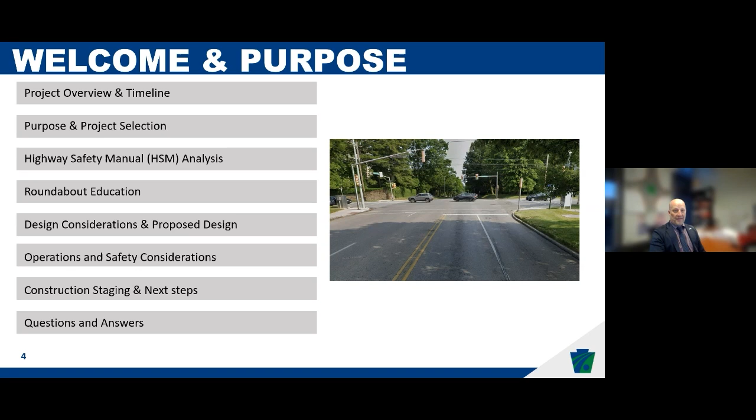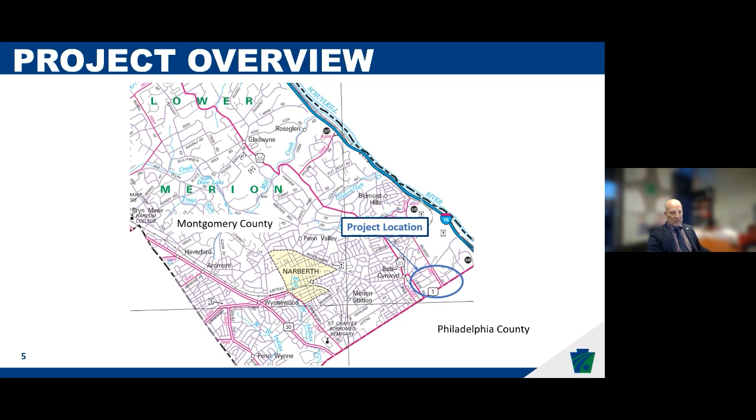This safety project is located at the intersection of Belmont Avenue and St. Asaphs Road. Belmont Avenue is a state route owned by PennDOT, and we're in Lower Merion Township in Montgomery County. The intersection itself is 1 block north of City Avenue, and the project is located within the City Avenue district, which is a business district. We've been studying this project since 2019, and we're currently in what we call the preliminary engineering phase. Throughout the process, there's been extensive coordination with Montgomery County, Lower Merion Township, the City Avenue District, and developers, and even some folks at the Sutton Terrace, even before the design received its notice to proceed. We're currently targeting construction for early 2027.

What we have here is a slide that's blown up from the intersection, and what I first want to acknowledge is that through our discussions with the township and the district, we've been informed of a lot of adjacent development. And through that development, we've discussed how to accommodate not only vehicles, but pedestrians and bicyclists. We also are aware that in the future the St. Asaphs and Clwyd Road and the Llanberris and Belmont Avenue intersections will have future signalized intersections, otherwise known as rectangular rapid flash beacons, which aren't currently built yet, but we are aware of those future improvements and have been coordinating appropriately.

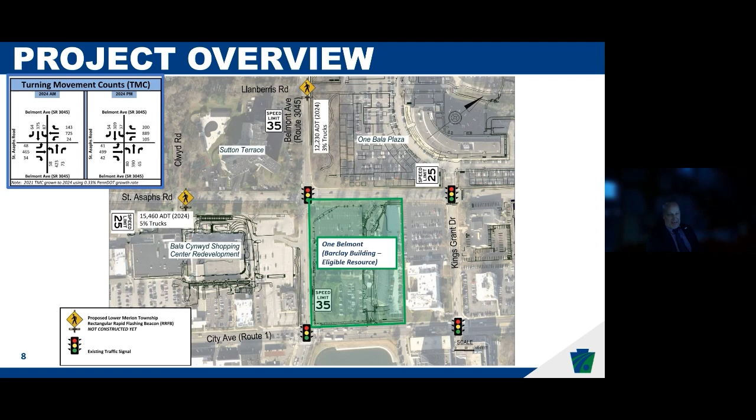Belmont Avenue runs north-south, or up and down on the screen. It's 4 lanes, or 2 lanes in each direction, and it has a posted speed limit of 35 miles an hour. It is a curb section with sidewalk on both sides of the road, and no shoulders are present. St. Asaphs, which runs east and west, or left to right, is also 4 lanes, 2 lanes in each direction, with a posted speed limit of 25 miles an hour. This is also curbed with sidewalks on both sides of the road, and no shoulders are present.

As part of our investigations and documentation process, what we call the NEPA process, we found that there are no streams or wetlands and one property of historical significance. The One Belmont, documented in the southeast quadrant, is an eligible resource, which we are calling the Barclay Building for its historical properties. Throughout our data collection and field visits, we've observed some very high running speeds. The intersection is underperforming operationally and has a high occurrence of injury crashes. There are existing crosswalks on all 4 legs, ADA ramps, and we've heard many concerns about how to cross the intersection as a pedestrian and a bicyclist.

Right now, the intersection processes about 28,000 vehicles per day, which are evenly distributed amongst the 4 legs. Moreover, what we've observed is a large percentage of left turn movements. You can see in the top left corner here, we have peak hour turn volumes, so that's the worst hour of the day. And so when we have large amounts of left turn volumes, it's tricky to process all of that traffic. Next slide.

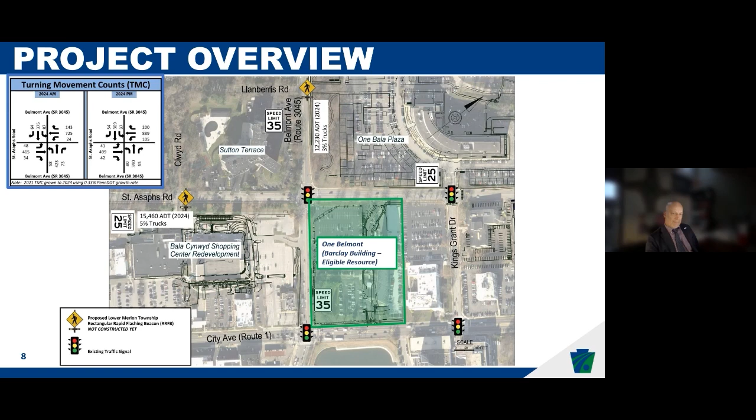Since the safety funding was awarded, the design team has been coordinating with Lower Merion Township and the City Ave District, as I mentioned, to ensure the design accommodates the future developments as well as the master bike ped plans for the area to really help out with those first mile, last mile connections associated with transit routes.

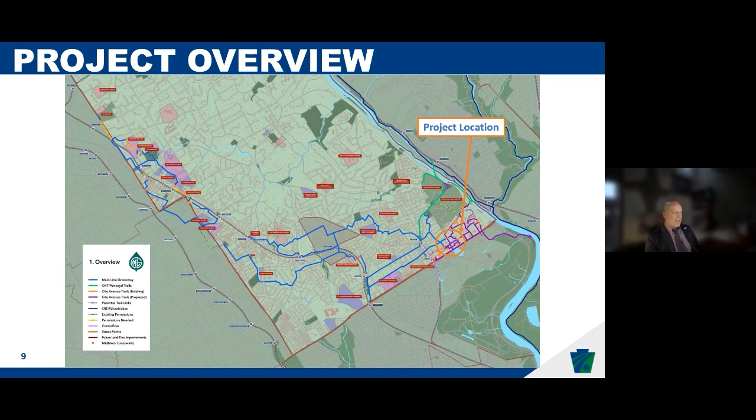PennDOT has revised the design a few times to include what we're calling a public multi-purpose path that is displayed on this mainline greenway map that Lower Merion Township provided us. Here's a snippet of the City Avenue District official map, which was adopted as an ordinance by Lower Merion Township through Zoning Code 155.

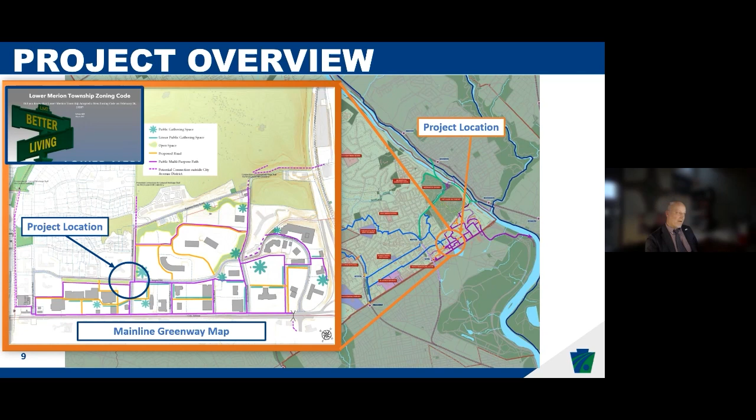As mentioned, we've been studying intersections throughout the 5-county region, otherwise known as PennDOT District 6. The goal of the program is to address safety needs at intersections by identifying locations where a roundabout would be suitable for what we call safety countermeasures. What we are trying to do is qualify for highway safety improvement funds, which are part of an FHWA program and are 100% federally funded.

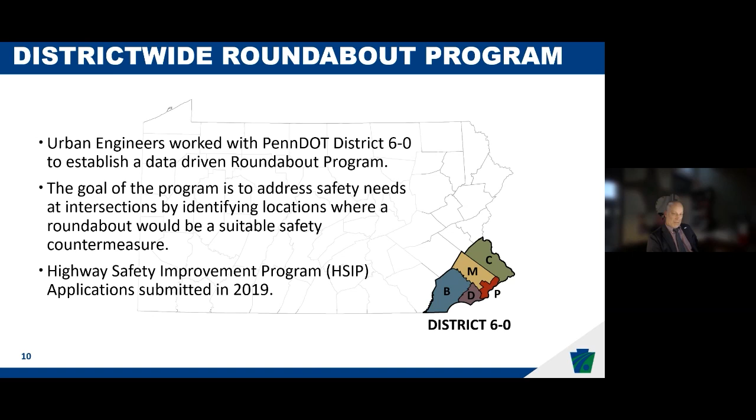And so the applications for this funding had to really be data driven. We looked for roundabout candidates based on crash clusters, and that's how this intersection came to be. As I mentioned, we had high running speeds and a large number of left turns, so it's no surprise that this was one of the worst intersections in Montgomery County from a safety perspective.

Andrew, do you mind showing and walking through the slide here?

Yeah, sure. Thanks, Mike. The intersection was selected by PennDOT as a high crash location in a 5-year period, which is a typical time frame that PennDOT analyzes crash statistics. The intersection had 37 total crashes. Of the 37 total crashes, roughly 53% had reported injuries. 88% were angle crashes, and 91% of the overall crashes had no weather or environmental factors.

So with this data, it was determined that the intersection needed improvements and that a majority of the crashes were not impacted by weather and were likely due to conflicts. Those conflicts Mike's going to highlight a little bit later in this presentation. The purpose of the project is to reduce the number and severity of potential crashes at the intersection. An additional goal of the project is to improve the pedestrian connections and to accommodate the nearby development.

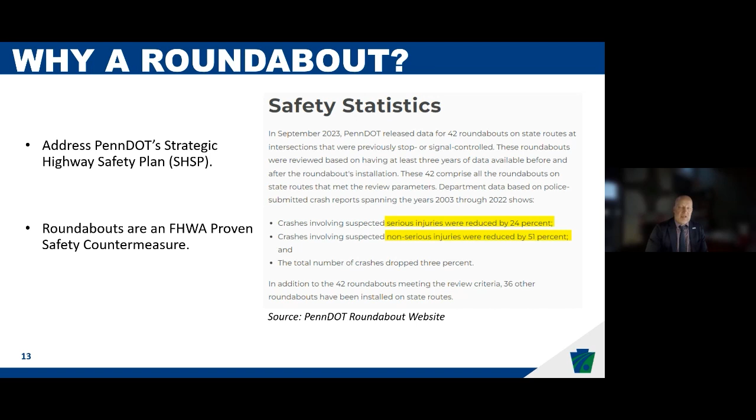But what's really adequate is that FHWA has a proven safety countermeasure, and roundabouts have been proven to reduce serious injury crashes and non-serious injuries by a large percentage. And the reason, if you go to the next slide, Andrew, is because we've standardized the rules of the road. We yield on entry and we provide deflection. You're just not physically able to drive through the intersection at a fast speed, and that's because you have to turn your wheel. Also reducing those conflict points and eliminating what we call T-bone crashes or left-handed turns where we have those conflict points.

Next slide. And so as you can see here in this graphic, we all know that speed kills. As the speeds are increased, the percentage of being injured for a pedestrian increases. And as you get to 40 miles an hour, 9 out of 10 pedestrians will die if hit at 40 miles an hour. Roundabouts, when we design them, we've reduced the operating speeds to around 20 to 25 miles an hour.

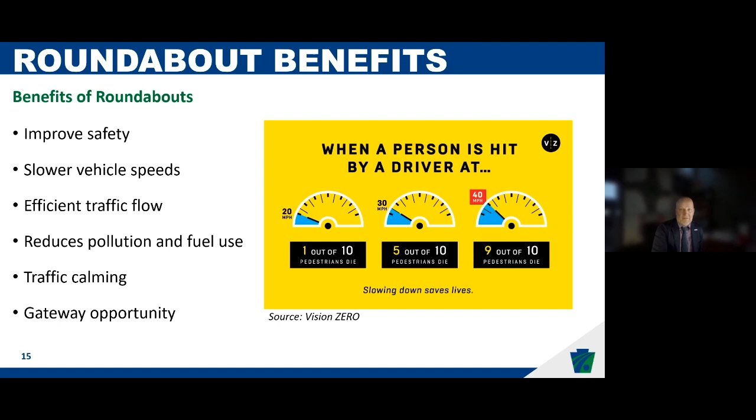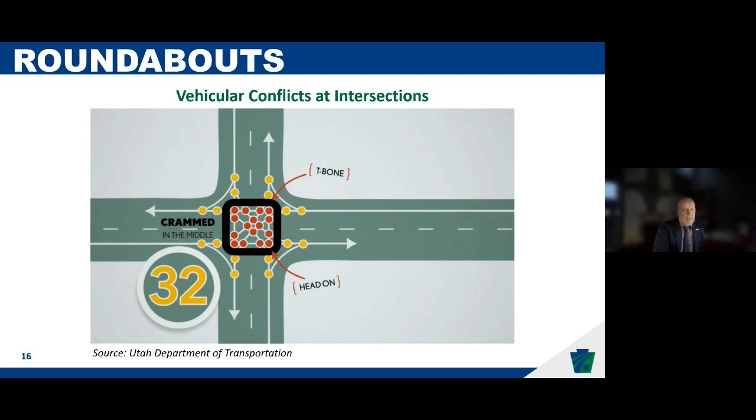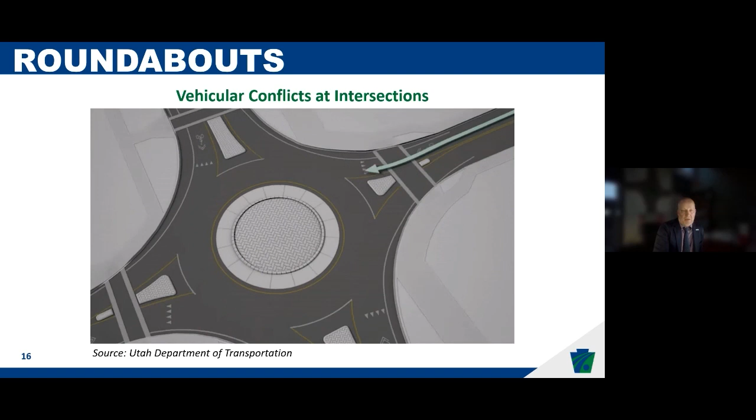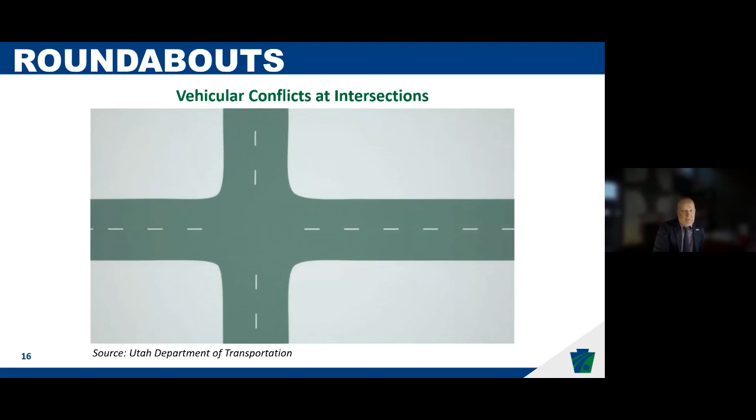I really like this graphic here. This was something that the Utah Department of Transportation has put together. And when we talk about conflict points, when you look at a conventional intersection, there's over 32 conflict points that are all in the intersection itself. One way to think about it is the roundabout eliminates those conflict points and almost alleviates those left-hand and T-bone conflicts. And so we've been able to reduce the conflict points by a factor of 4. The next slide here shows what a traditional intersection has for conflict points, 32 versus 8.

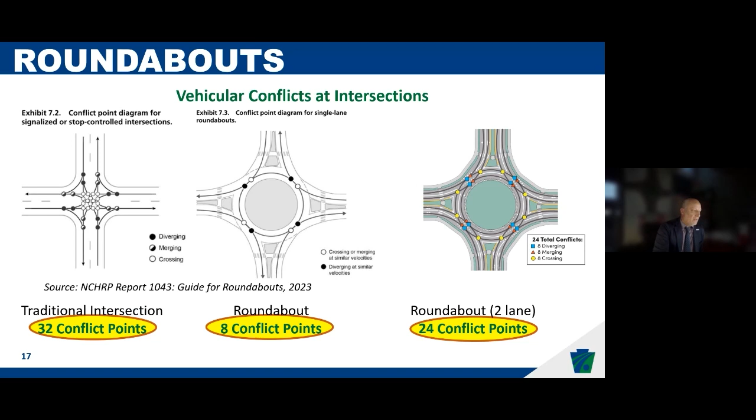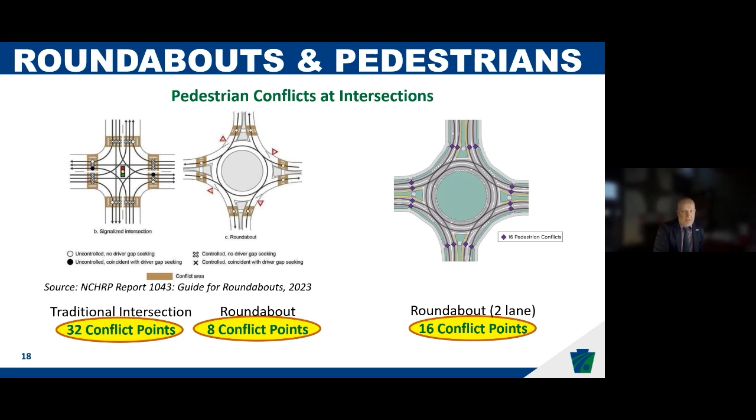Now, we all are under the impression that this is not a single lane roundabout, and that is true. We're talking about a multi-lane roundabout. So we are reducing the conflict points from 32 down to 24. That's for vehicles. Now, for pedestrians, we also have quantified, and this is straight out of the roundabout guide, the conflict points associated with pedestrians have also been reduced from 32 down to 16 with our multi-lane design.

So roundabouts allow drivers to focus on pedestrians and vehicle movements separately. What we do when we're designing for crossings is that we've focused the driver's attention on the crosswalk first by staggering the location of the crosswalk from the yield bar. That allows the drivers to first focus on the pedestrian crossing and then to move forward and focus on the task at hand, which is yielding to the circulatory roadway.

Additionally, we've taken that crossing distance and we've reduced that. So from a conventional intersection, instead of crossing two directions of traffic, we are now only crossing one direction of travel. And the reason is because we introduced these splitter islands or refuge areas in the middle. So a pedestrian will be able to cross one leg at a time and focus their attention on one direction of travel. Having shorter crossing distances allows us to give the pedestrian a little bit more sense of a safer feel for crossing the intersection.

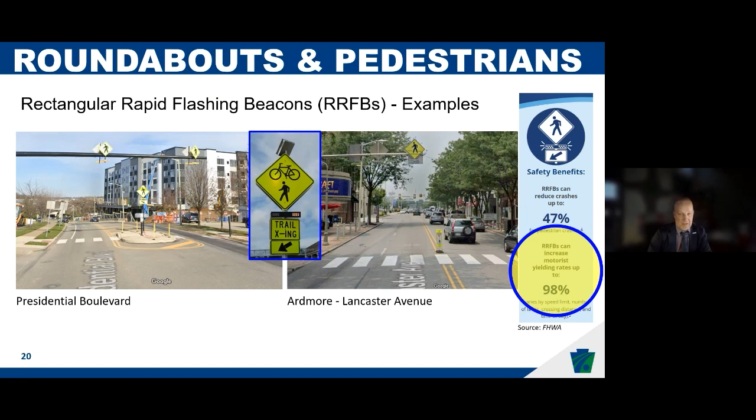So I think what everyone's really waiting for is to see exactly what it is we're proposing. Andrew's going to walk us through some of the design attributes of our design, and we're going to show a video later on that actually shows traffic simulation. Yeah, thanks for explaining how we got to this point, Mike. Now let me get into some of the specifics of the design.

What you see on the screen is the current proposed design concept. This was developed after a few iterations were discussed with local stakeholders and PennDOT while acknowledging the existing and future developments in the area. Additionally, we're balancing slower expected speeds and accommodating large vehicles, and then also being aware and conscious of the need for safe pedestrian and bicycle crossings.

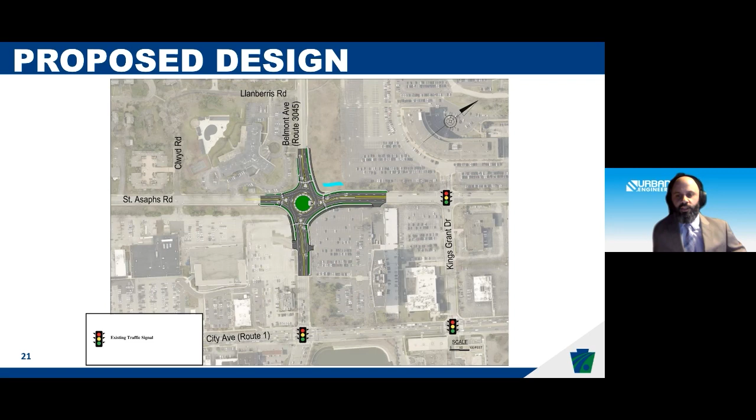Now in this graphic, we overlaid all of the proposed development. The proposed roundabout accommodates all of the adjacent developments. We are able to not only maintain but improve the proposed access points with the slower speeds around the roundabout to have the safer ability to judge vehicle gaps. The design team has been in close coordination with the township regarding the surrounding developments throughout design.

To the west and north, you'll see 2 rectangular rapid flashing beacons. These are proposed. They are not out on the roadways yet, but they are proposed through development with the township. And just wanted to note that they're not part of this project, but we have been including them with our operational analysis. They're still in the planning phases.

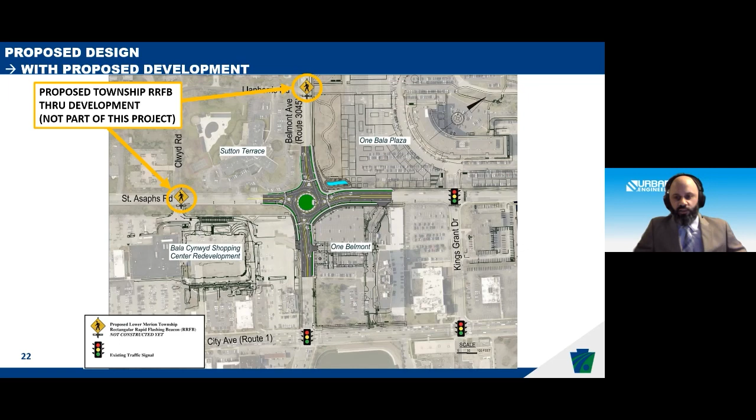In the center here, the green circle, now a yellow circle. This is going to be a raised proposed central island, currently shown in green for grass. However, this is an opportunity that the design team will coordinate with the township to install landscaping, which will also include a maintenance pad for safe access to the landscaping. This provides a great gateway opportunity for the township. Since the project is exceeding an acre of earth disturbance, we are required to manage stormwater through a proposed stormwater management basin located in the northeast quadrant, shown in light blue.

A lot of the concern from the township and the locals throughout design has been pedestrian mobility. As part of coordination with the township, PennDOT has committed to install rectangular rapid flashing beacons on all of the crossings. At these, you will see yielding compliance has increased upwards of 90% based on what Mike mentioned earlier from federal highway studies.

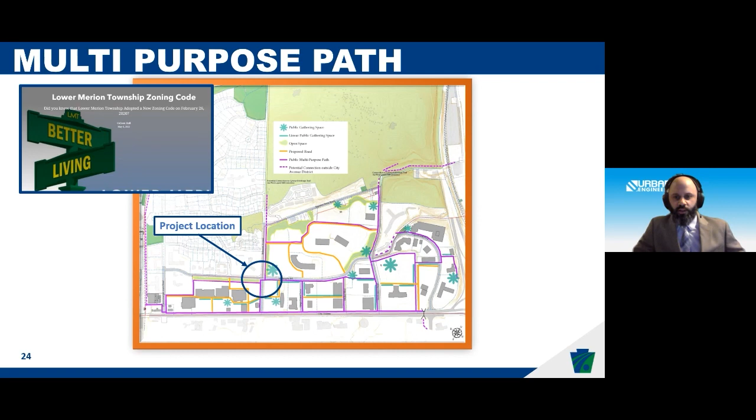Additionally, Mike also mentioned our coordination with the township and the City Ave Business District to ensure that the design accommodates the Mainline Greenway Master Plan. Through this coordination, we've revised the design to include a proposed public multi-purpose path that is displayed on the graphic in purple. So here, this is the project again. And now I'm going to be highlighting the proposed purple path that matches the Lower Merion Greenway proposed. The required cross sections for these paths are going to be based on the zoning code, chapter 155 for the township.

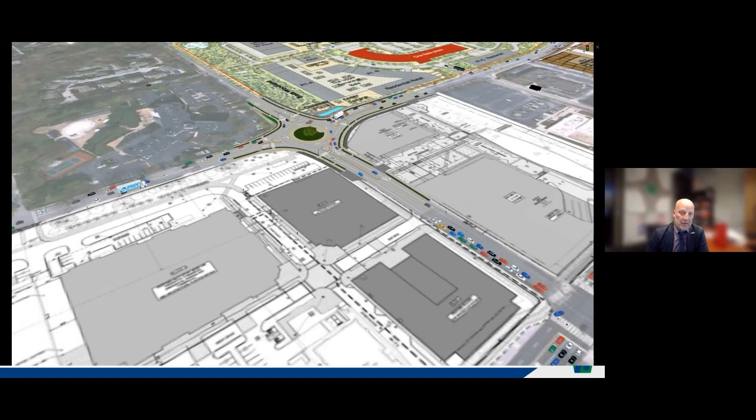And just want to make sure that everyone can see this because we are streaming it. It may come across a little choppy, but I think for the most part, you'll get a really good sense of how the roundabout will operate. You can see here we have the rectangular rapid flash beacons at the crosswalks. We also are showing those multi-use trails, the darker. I think I saw a question that we can get to. These trails and sidewalks are anywhere from 10 to 12 feet in width.

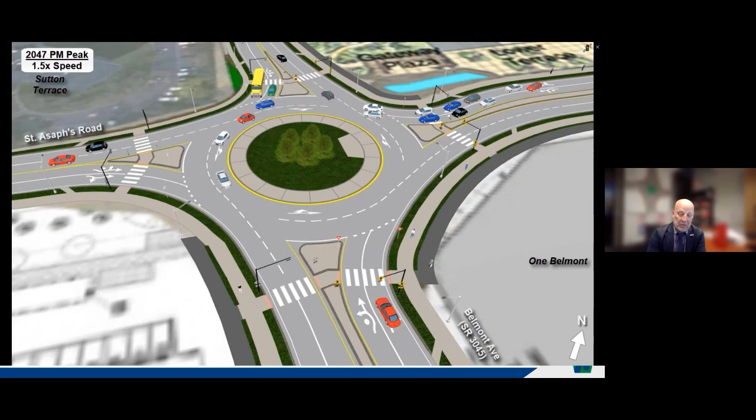And then we do have a buffer, a grass buffer there to provide a little bit more comfort, but also areas for snow removal and signage, and to give the pedestrians more of a safer feel. Like I said, we've been coordinating with the development. That one Belmont is being proposed to be right up against the street. And so we've worked hard with those developers to make sure that the design is going to work with the proposed development. You can see here some of the larger trucks going through, those WB62s with the 53-foot trailer.

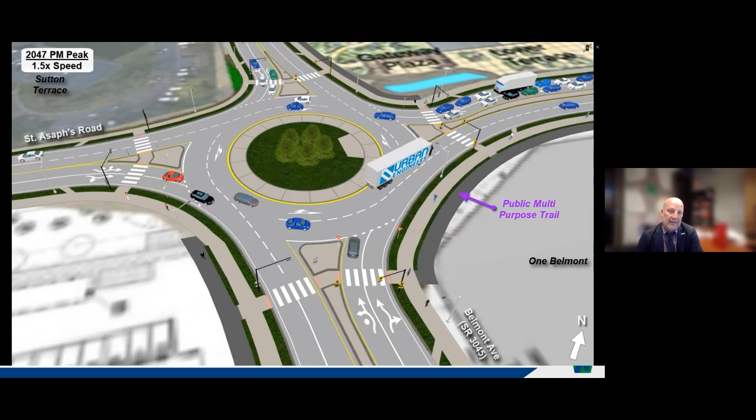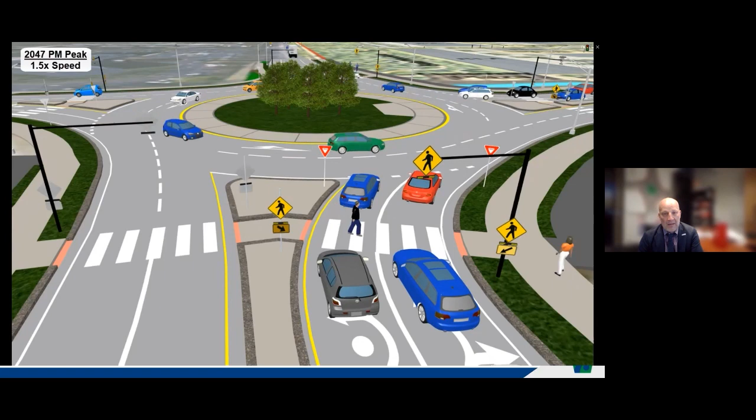And I think everyone probably is seeing some of the queuing on that east leg and how it will dissipate. The simulation also here will show how a pedestrian would cross. Again, note that this is 1.5 times speed, and also it might come across a little choppy due to the streaming limitations that we have. You can see in the northeast quadrant there, we have a stormwater basin, which will help with some of the erosion and sediment control during construction, but also after in the final condition.

Before we jump to the next slide, Mike, I just want to note that this video does come across a little bit choppy through this Teams Live feature, so the video will be posted to the PennDOT website after the presentation.

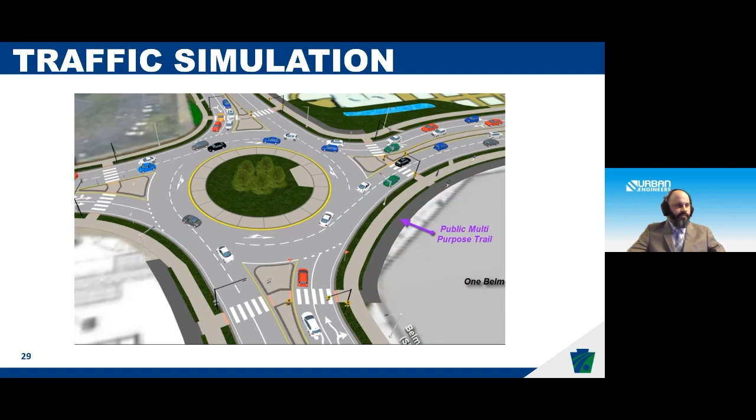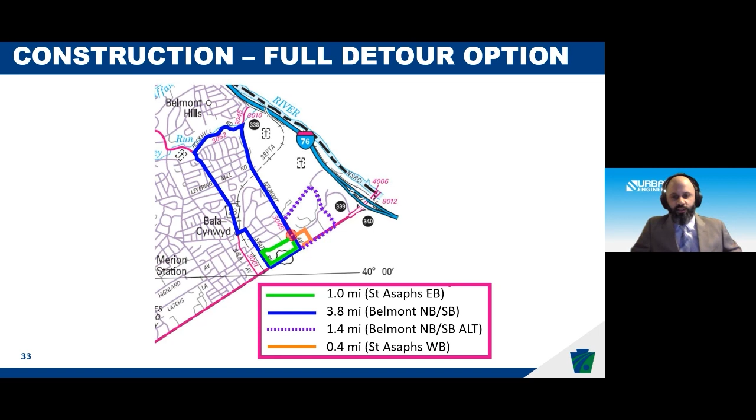These options are still being discussed internally at PennDOT through the traffic unit, and PennDOT wanted to present these options to the public for input. Fully phasing the intersection with no closures would not be possible due to the location of the roundabout being in the middle of the intersection and the limited right-of-way for the project based on the adjacent development.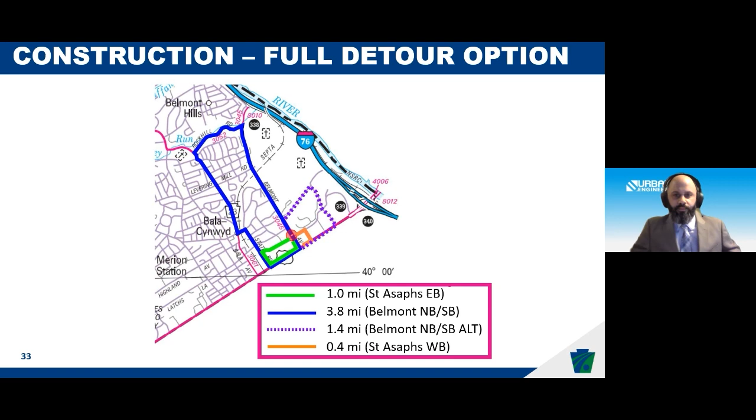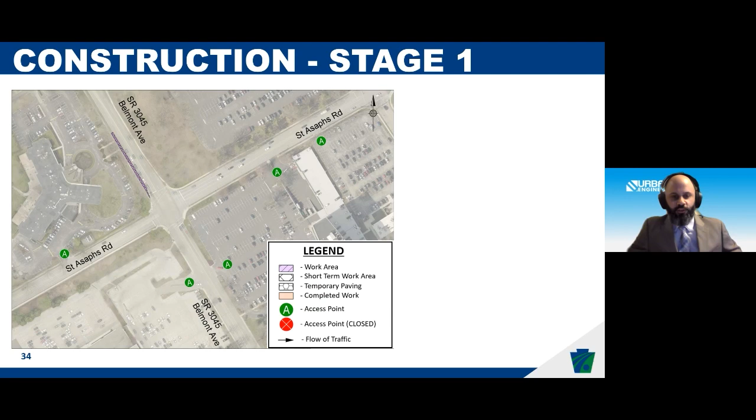Next, I'm going to get into what the partial detour option through 4 construction stages looks like. I'm going to run through 4 slides here, laying out how this would be built utilizing a partial detour, which will be closing the St. Asaphs Road eastbound and westbound legs. During stage 1, the contractor will construct some minor temporary widening on southbound Belmont Ave. It'll be done utilizing short-term traffic control, so minimal impacts during this stage. This next stage will be the largest stage of the project. We will be detouring St. Asaphs Road. This detour for St.

Asaphs Road will be done through stages 2 through 4. The detour routes utilize Conshohocken State Road, Route 1 or City Ave, and Kings Grant Road. Again, to remind everyone, the design team is recommending a partial detour to shorten the duration of construction and provide an easier, safer work area for the contractor. And also to eliminate the temporary intersection control at the intersection itself, which would be a temporary signal, and that would drastically impact the intersection to jam up during construction.

All traffic will shift to the western side of Belmont Ave during this stage, with lane closures to a single lane in each direction. This allows the contractor to construct a majority of the required drainage, stormwater management facilities during a single stage. Access to the southeastern quadrant property driveways fall within the work area, as I can note here as I'm highlighting, and these will be done through sub phases to make sure that they have access throughout construction.

I would like to note that while St. Asaphs Road is going to be closed to vehicular traffic, the sidewalks will remain open throughout construction with minor interruptions and minor detours. On stage 3, we're going to be shifting the Belmont Ave traffic to the eastern side of the roadway, utilizing the newly constructed portion of the project and some temporary pavement. St. Asaphs Road will still be closed for this phase.

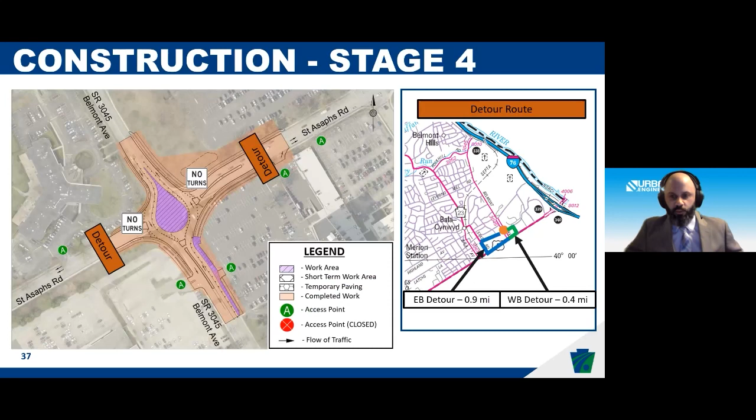Next, we're just going to get into kind of what's next for the project. Mike, do you want to take this one away? Yeah, so last but not least, I think we're trying to give you a sense of the project timeline as we move forward. We mentioned we were in that preliminary engineering phase where we're finishing up our environmental studies, having this public engagement piece. We do have some final design activities and some permitting to work out, but ultimately the project is scheduled for construction in the spring of 2027. The last few years, we've spent a lot of time studying and analyzing and trying to better understand the needs of the community. And I think with that, Nate, we'll turn it back to you for questions.

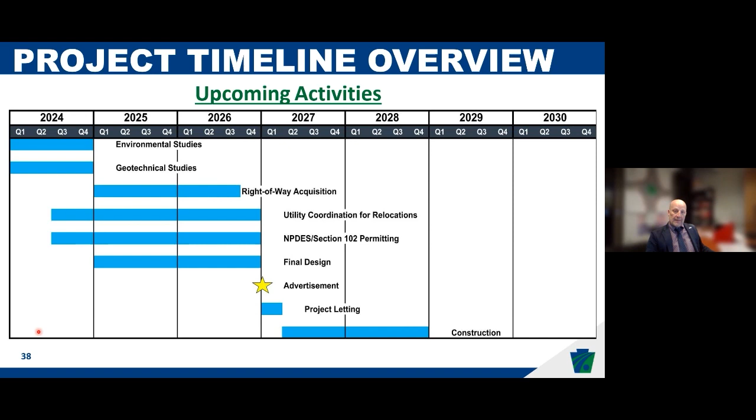Thank you, Mike. So with that, we're going to start responding to the questions that have been posted in the Q&A. Also, please keep in mind if you're able to navigate to the project webpage, there is a comment form where you can ask additional questions and continue to provide feedback on the project and the presentation this evening. So with that, I'll start to read the questions and then we'll respond. I'm going to read the questions in the order that they were received. All right, so the first question.

So my name is Nancy Goldman. I am the president of Sutton Terrace. We have 172 units. Many are represented at this meeting and over 40 people are attending in our social room. Chris and Jillian have spoken about the importance of connectivity and walking and biking in this community, getting to the new exciting developments. We have significant safety concerns about our roundabout for pedestrians, bicyclists, and cars, especially since it is now a 2-lane roundabout. The least safe according to the articles I have read. With all the planned development on the 3 corners, there will be even more traffic.

The Bala Cynwyd Neighborhood Coalition consists of more than 1,000 concerned voters and taxpayers residing in more than 750 homes in the community, including Sutton Terrace, the Fairmount, 191 Presidential, I apologize if I pronounced something incorrectly, the Trianon, the Corinthian, Hillgate, Minford, the Court of St. Asaphs. There are also local preschools, a law firm, and single-family homes. In March of 2022, following the last PennDOT meeting, we sent almost 500 signed petitions to PennDOT, our commissioners and local officials asking for a safe pedestrian, bicycle, and car-friendly neighborhood. We asked the Township to work with our elected officials, Township staff, and PennDOT to benefit everyone in Lower Merion, a safe community.

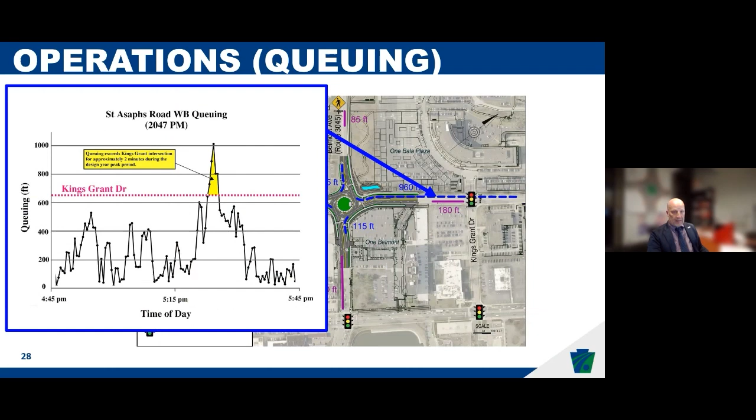And I know this comment was posted earlier on in the presentation. So hopefully some of the comments there, we've kind of discussed in the presentation itself. But I guess, Mike, you just want to touch a little bit more on the pedestrian aspect of it, and I think there are some subsequent questions on the same issue. Andrew, if you don't mind going back to an earlier slide that showed the pedestrian crossing in the proposed design, where you kind of highlighted some of the different attributes.

Again, I want to reiterate that we're trying to slow speeds down. We observe very high running speeds right now. Additionally, crossing the intersection right now is not advantageous. And so what we're trying to do is make it more accommodating for the other modes of traffic. We're trying to improve operations, the safety, and the multimodal piece, which is the bike and peds. And then there's a fourth attribute, and that's access. And I want to address the access because I don't think we completely hit that in all of our slides.

So these are shorter crossing distances with slower speeds, and we're focusing the attention in one lane in each direction, or in one direction. So 2 lanes of crossing, you hit the splitter island or the refuge, and then you focus your attention on crossing the second. So we're segregating that crossing into 2 separate crossings, and we have the push button controls with the rectangular rapid flash beacons, which has been shown and studied that the yield compliance there is very high.

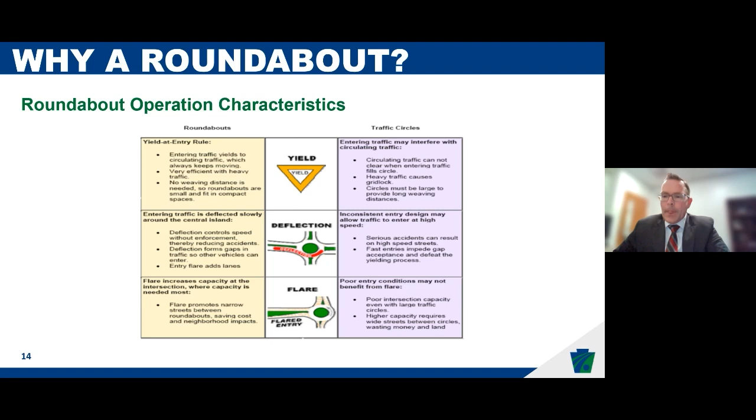Next question, what is the turning radius required for a 60-foot tractor trailer? I guess, Andrew, can you pull up again the slide on the truck turns and just go over that? Yeah, while he's doing that, I can try to answer. There is a minimum radius, but it depends on the speed that the truck's traveling and the angle and the approach. It has an axle length. That's where the 53 comes in. So we measured from the kingpin to the rear axle group, and what we use is a program called AutoTurn to model it, and it simulates how the driver would navigate through the roundabout.

Those trucks directly compete with us trying to provide deflection and flare and allowing for slower speeds. And so we have a balancing act of accommodating the larger vehicle while also trying to make sure that at non-peak times, vehicles like passenger cars at midnight or 2 in the morning can't blow straight through the intersection. Andrew, did you have anything else you wanted to add?

No, unless the comment is also trying to reflect 2 tractor trailers in the roundabout at the same time. And if that's the case, likely drivers are going to take over the roundabout themselves and navigate their turn and then exit the roundabout. There have been roundabouts designed to accommodate what we call side-by-side movements of 2 trucks navigating next to each other. And through studies, it's just not the case of what drivers actually do.

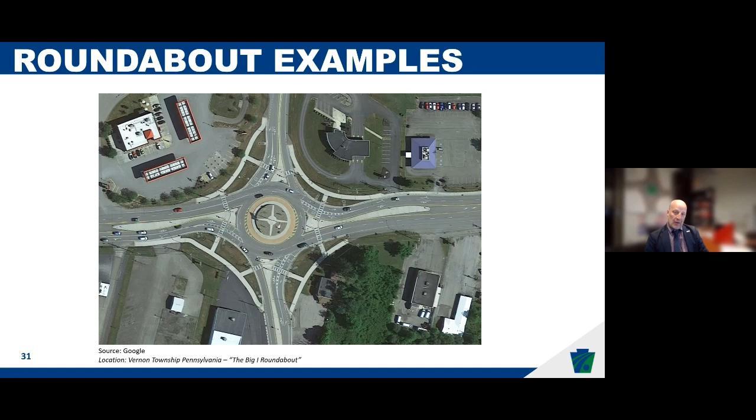Next question is how much land will be taken from each of the corners of the intersections. I don't think, and Andrew and Mike, let me know if you disagree, we've calculated the exact areas yet of how much land will be taken. There are definitely impacts at each of the four corners of the intersection to build the roundabout with how we're currently proposing to build it. Is that a fair assessment? Yeah, we're still in preliminary engineering, and up next we'll be getting into final design, which is the right-of-way process, and that's when we'll really fine-tune the impacts to each parcel.

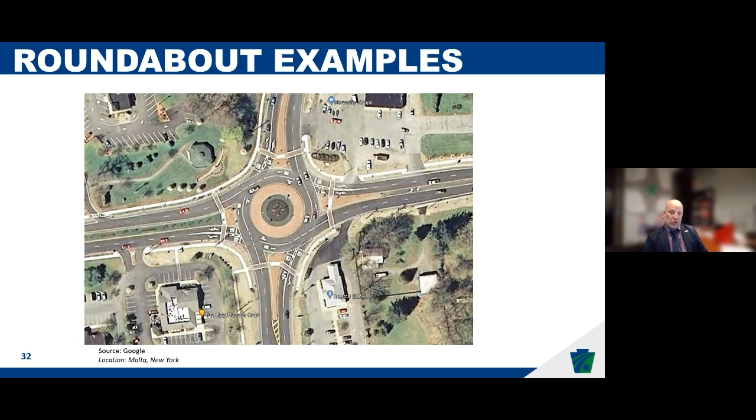I will add that I feel like the right-of-way associated with the roundabout, when you compare it to a signalized intersection when adding the left turn lanes, is comparable. So it's not as simple as just adding a left turn lane. There is right-of-way and constraints associated with both, added to the safety benefits that we showed in slide 12, Andrew, with the signalized showing an increase in predicted crashes. I think an interim improvement just isn't feasible.

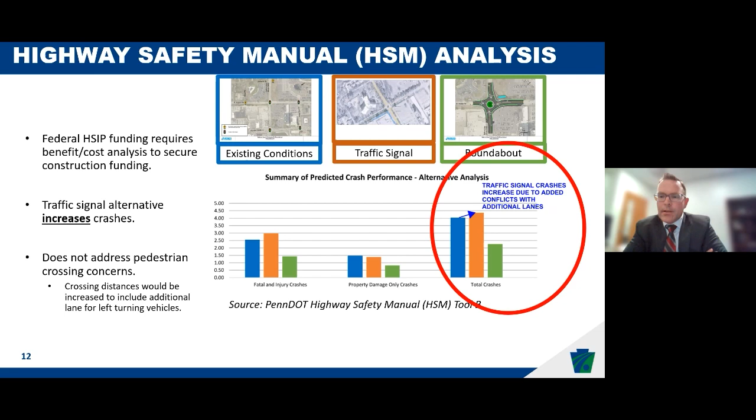Next question: according to the 9/2021 PennDOT list of roundabouts in the state, there's not a single site that is comparable to the proposed intersection at St. Asaphs and Belmont. Most are in less densely populated areas. The only ones in urban settings are located at complex multi-leg intersections. Is this intersection the only one that is in an urban setting? And I think it means multi-lane in an urban setting. Mike, do you know of another? Sorry, Nate. The Big I is definitely in an urban setting, as well as the Malta intersections. Very similar context to St. Asaphs.

I am familiar with successful roundabouts. For example, the Route 222 corridor between Kutztown and Reading was a constant problem. Every intersection would back up. 222 is a heavily trafficked road. The roads feeding in are rural with much lighter traffic. This is a very different situation. Both Belmont and St. Asaphs are heavily traveled, and I fear that this will lead to quite heavy traffic in the roundabout, endangering not only drivers, but also pedestrians.

Heavy traffic coming into the roundabout will not be stopping and will be coming from four directions rather than two. Blinking lights are not a solution for pedestrians. Every pedestrian who presses that walk light will be causing a traffic jam in multiple directions. That, of course, is assuming that the cars will stop, which I doubt. Mike, can you just touch again on some of the actual benefits?

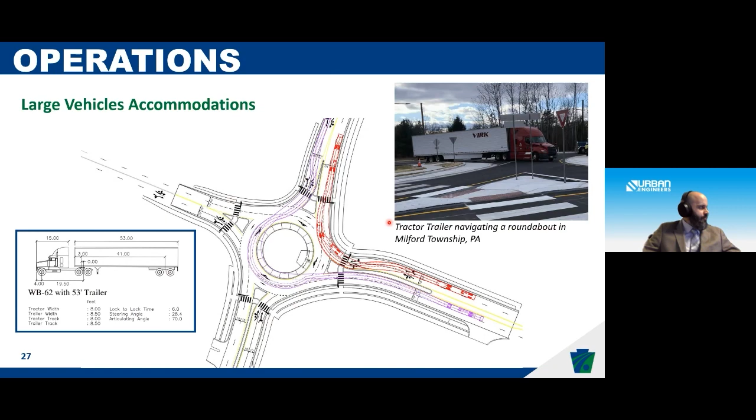Yeah, bear with me. So signs will be posted at the corners of the splitter islands to let you know. If you need to, go to the Walnut Lane intersection real quick. I think they may be able to show an example of a sign. Maybe that one with the lighting. Yep. So you can see here, green on white. It has an arrow. It's probably hard to see from this slide, but that's generally how we sign. And the beauty of it is if you miss your turn or your exit, you can take another lap around the roundabout and exit without going out of your direction.

Next question, how is traffic diversion accounted for in the traffic modeling? Congestion on City Ave will divert if the roundabout is successful, thus attracting more traffic. Mike, can you just comment on what we did or didn't include in our traffic modeling? Yeah, so what we do is we take the existing traffic counts that we gather when we first start the project. We document those, and then we use a growth factor to build up and extrapolate a growth. In this case, we use whatever PennDOT puts out on an annual basis for that roadway context and for that county. And we grow that to a 20-year design horizon.

One of the reasons that we're still in preliminary engineering is because we've heard and seen and coordinated with all the additional development. And so that development will inherently bring more traffic or more trips to and from those developments and through the intersection. And so we use what the developers document and put into their submissions, and then we build upon that with our growth rate.

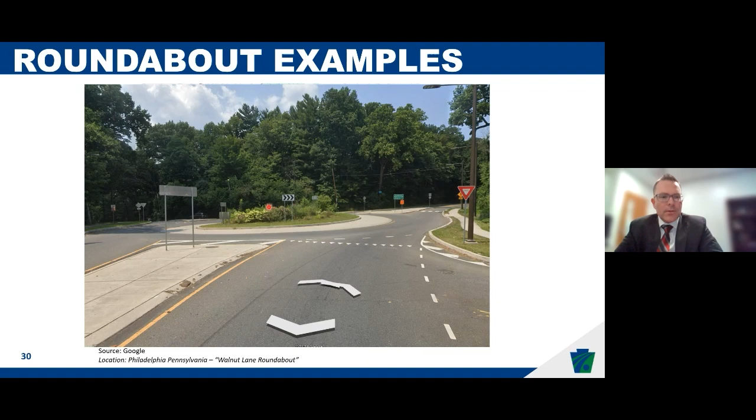Next question, you indicated that in 5 years there were 37 crashes. How does this compare with other intersections? Andrew, can you go back and kind of retouch on the slide that explains how this intersection was selected? In slide 11, Andrew. Go back to slide, or sorry, yeah, that one there.

Nate, this is a diagram of all the crashes from that 5-year crash period. As you can see here, a lot of rear end and angled crashes. And so because of the higher speeds and the lack of ability to judge those gaps while turning left, I also feel like there's a lot of frustration when navigating the intersection during the peak hours and trying to get through the intersection. If you have one person who is trying to turn left, it effectively does not allow that lane to allow for vehicles to drive through the intersection.

And so at the end of the day, we take these crashes and we look at them, and we use the Highway Safety Manual, which ultimately is a quantitative way to justify and predict the number of crashes that are associated with different types of improvements, signalized improvements, roundabout improvements. And when we compare that cost benefit ratio, we're seeing a net benefit and a reduction in crashes and severity of crashes.

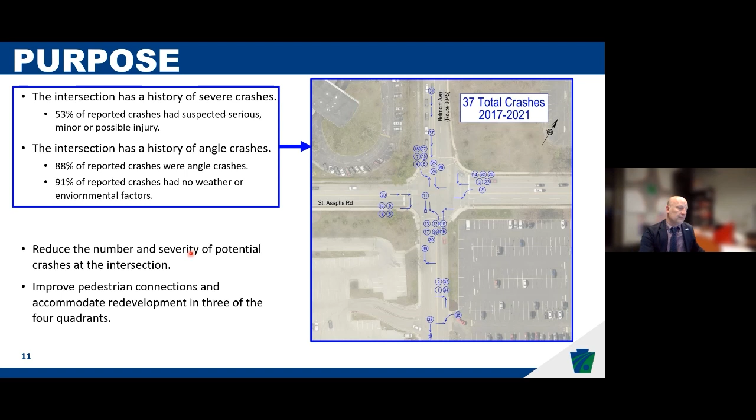Will cameras be installed at each crossing? We're not proposing to put cameras in where the pedestrian crossings are being installed for the roundabout. What about the many emergency vehicles speeding down Belmont Avenue? And I would say those will continue to operate similar to how they operate today. As they're traveling on any road, vehicles will have to move to the side as they approach the roundabout, so that they can get through the road or intersection.

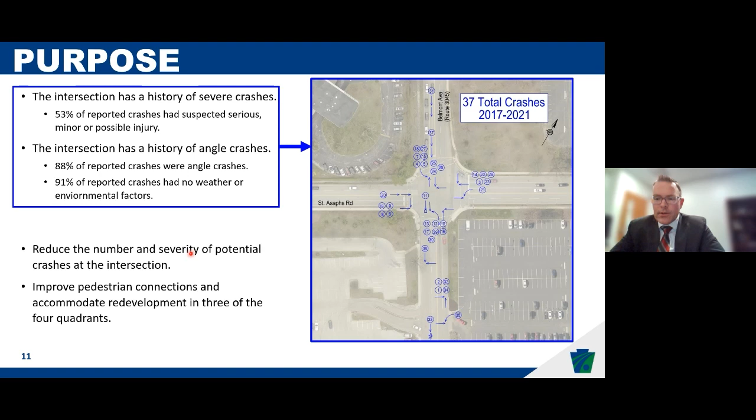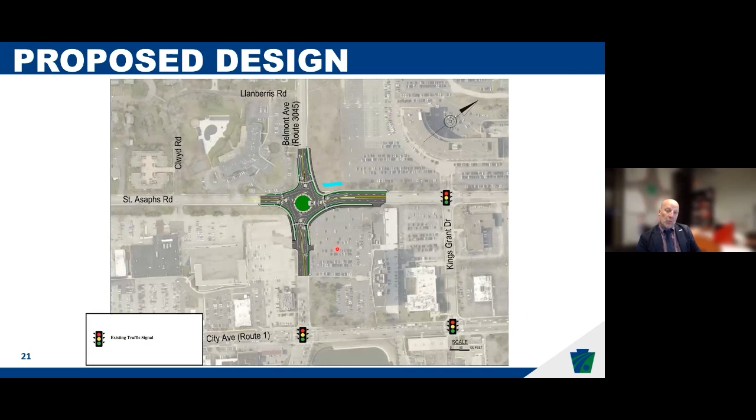How close can a normal intersection be with or without signals? I guess, Mike, can you touch on that quickly? It's a very case-by-case situation, but what we do try to do is look at how the signal and the roundabout interact, and we look at that in the design year during the peak hour, and that goes back to the other graphic of those queues.

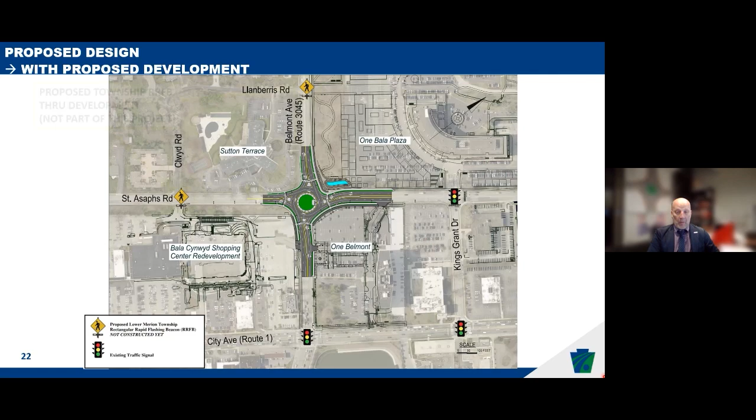And so a closely spaced roundabout to a signalized intersection could be problematic, but in this case, our intersections that are signalized or proposed to be signalized are spaced far enough out where, in the worst 15 minutes of the day, the queuing isn't going to affect the operations of the roundabout, and vice versa. The roundabout won't impact the upstream and downstream signalized intersections.

What additional street lighting is needed for roundabouts and crosswalks? Lighting is recommended for roundabouts that are being installed, and there's a lighting analysis that the design team will need to complete to make sure that the area is being lit properly. Will there be accessible pedestrian signals for all crosswalks per PROWAG guidelines? Yes, we're going to meet the criteria for pedestrian accessibility and ADA guidelines for the crosswalks and curb ramps within the project area.

Who will make the final decision to leave as is or move to a roundabout? I would say it's a shared decision between PennDOT, the community, the township, and other stakeholders in the area. We really want projects to be successful. We want them to be supported by the community. So that's part of the reason for this meeting tonight, to go over the proposed improvements with the community, to get feedback on the project, to see if there are improvements that we can make, anything that we should be doing differently.

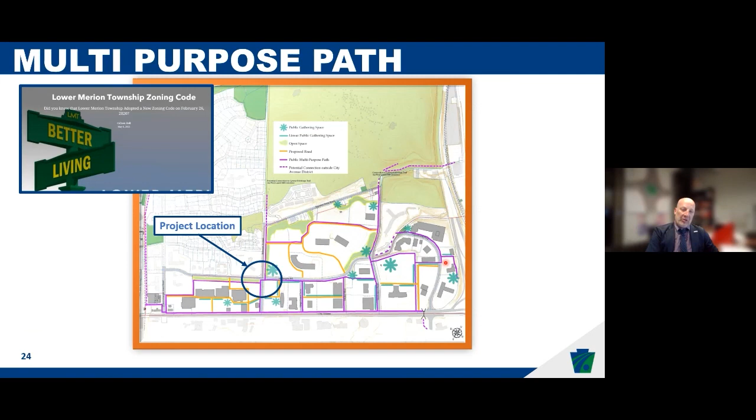Yeah, by providing the deflection and the raised curbing, we're just not seeing the ability to. What we do is a fastest path check with our geometry. And so again, we try to accommodate the larger vehicles, but at the same time, we don't want the other passenger vehicles speeding through the intersection.

And so the visual cues associated with some of those curvatures and the curbing and narrowing the lanes down inherently provides the ability for a driver to assess that they're going to be navigating the roundabout and slowing down. Additionally, on the approaches, there's advanced warning signs that a roundabout is ahead.

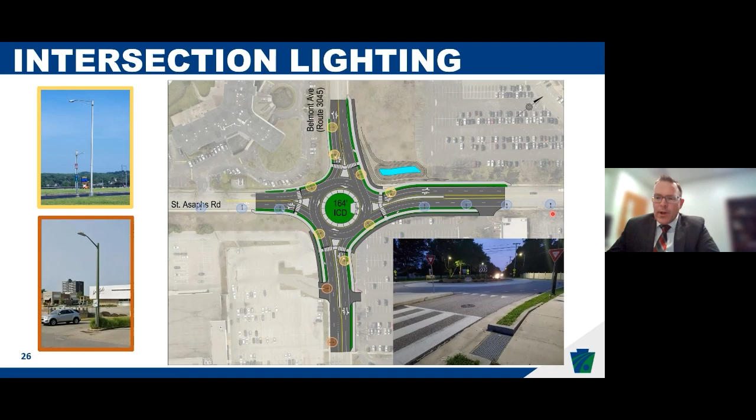During rush hour, the lights at City Avenue present crossing problems. One lane goes right, one lane goes left in the center, straight creates a backup. With this roundabout, will a backup create further problems? Yeah, Mike, can you just touch on this?

In order for pedestrian volumes to impact the operations, it has to be over 100 pedestrians per hour; that's where we're starting that threshold where it would start affecting operations. And we're just not seeing that type of pedestrian crossings. A good example might be at a university or a school where we have a large number of pedestrians crossing in a concentrated amount of time.

Next question is, won't increased traffic make entering the roundabout a challenge? Can you say that again, Nate? Won't increased traffic make entering the roundabout a challenge? No.

Yeah, and I think what the analysis shows is that the roundabout is able to handle the volume that's coming through the intersection, that vehicles will slow down, and even as development happens, as maybe some traffic patterns shift, the roundabout will be able to handle the increased traffic to accommodate vehicles traveling through the intersection.

Next is on property impacts, wondering what that looks like. In the future as the project moves forward, for any property that's impacted, there is a right-of-way process that PennDOT goes through where there's discussions and negotiations with property owners, where we try to work towards an amicable resolution to any impacts to a property.

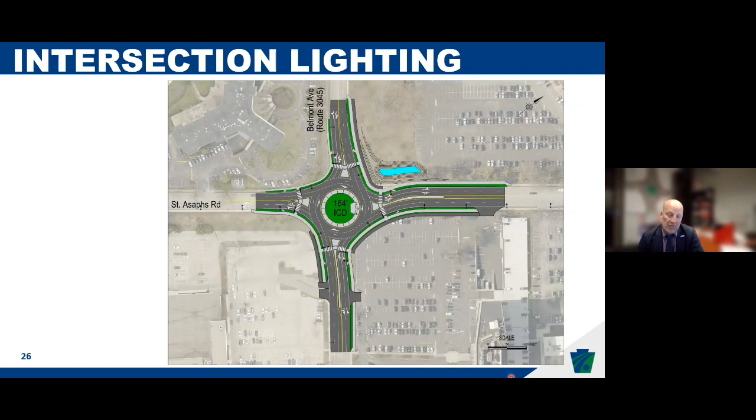But Mike, can you touch on what the thinking is for how to, I guess, mound or not mound what's in the middle of a roundabout? Yeah, so the inner circle is that green circle. It has what we call a truck apron, which is a mountable curb to help with that over tracking for the larger vehicles, but still narrowing the lane and providing that deflection we need to keep the speed slow.

Additionally, we want to mound and provide some sort of visual obstruction in the inner circle. So when people are entering the roundabout, and Andrew, please use your cursor here, we want them to focus on the task at hand, and that's focusing on the upstream traffic or this traffic approaching from the left. Rather than someone, let's just say northbound on Belmont, focusing on southbound Belmont entering.

And so by mounding and providing landscaping, which is a great gateway opportunity, not only for the township, but for the community, we're restricting sight lines through the intersection. So drivers are focusing on the immediate decision points, which is the merging into the circulatory roadway.

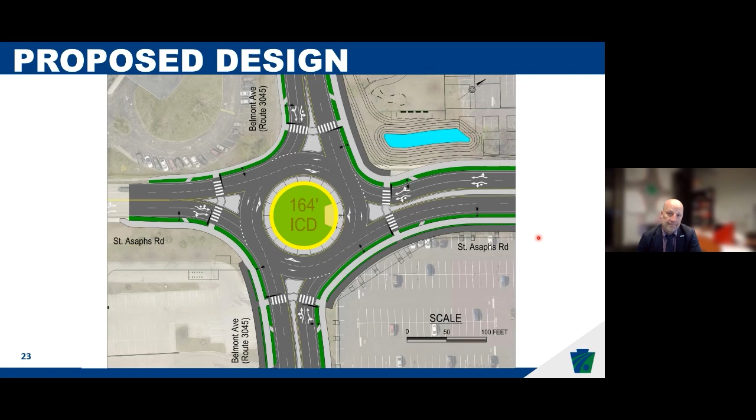Mike, can you also touch on the next question, which is around that drivers will be focused on cars in the roundabout and not on pedestrians. Can you go back and show kind of that staggered, two-phase approach? Yeah, so current best practices really show that staggering the crosswalk away from the yield bar is the best way to handle this. What we're trying to do is segregate the decision making of the driver as they're approaching the circulatory roadway. We want them to first focus on the pedestrian crossing, and once that is clear, then they can move forward and focus on entering and yielding into the circulatory roadway.

And so we typically provide enough for 1 to 2 car lengths between the yield and the crossing. However, the farther we push that crossing back, the less likely it is for a pedestrian to navigate farther and farther away from the intersection. So it's a balancing act, but we stagger the crosswalk from the yield bar for those distinct reasons.

And I think some of the next questions were similar to ones that we answered. So I'm going to go to: if this relatively complex roundabout is received poorly by the community traveling public, is there a concern that getting support for future roundabouts in the region may be more difficult, even if other locations may more easily support a simpler single lane roundabout?

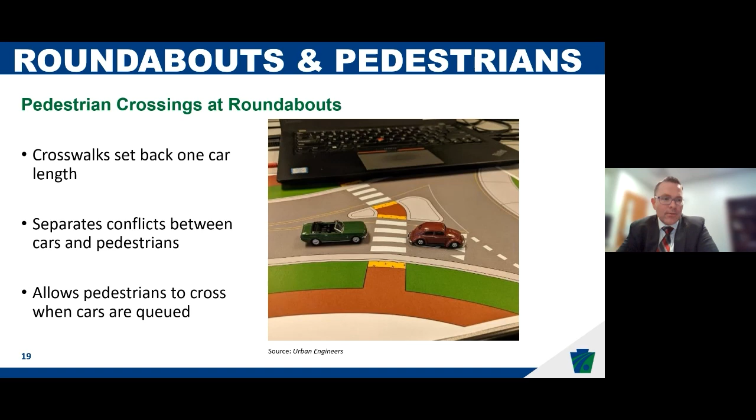And I think PennDOT is really aware of that. That's why PennDOT is really committed to making sure that any roundabout, single or multi-lane, that gets installed is vetted and properly designed so that it is successful, because we realize that if it is not successful, it could impact the ability to install more roundabouts at different locations in the future. So there is a focus on that.

It is recognized by PennDOT, and that's why you see PennDOT building roundabouts, continuing to study the statistics from those roundabouts to understand how they're operating, and make improvements to other roundabouts in the future. So that is a definite item that PennDOT's aware of, and that's why we're focusing on not just this roundabout but other roundabouts to make sure they are designed properly, operate properly, and are safe for all modes of transportation.

Well said, Nate. Let's go to,

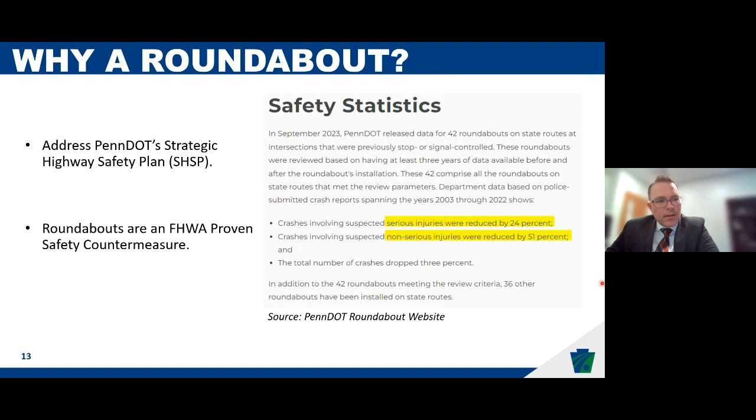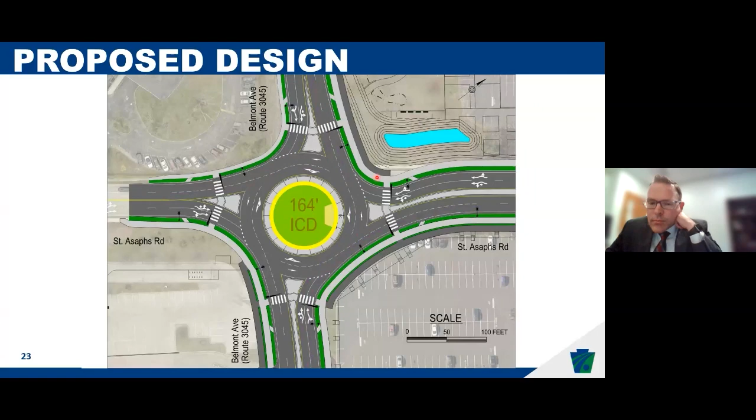Will there be dedicated bike lanes, which don't appear on the current slides? I guess, Andrew, can you go back, and maybe Mike or Andrew just touch on how the bikes will operate there? Yeah, so current best practice is not to include a formalized bike lane in the actual roundabout itself. Again, near the crosswalks, we provide the opportunity for a bicyclist either to remove themselves from the cartway and use the pedestrian and bicycle crossings, or to merge into the traffic stream where the speeds are the slowest and navigate the roundabout as if they were a motorized vehicle, so that they take over the lane.

Andrew, did you have anything you wanted to add? No, not other than the fact that we are accommodating the township's ultimate goal of the corridor of having a separated multi-purpose path from the traveling public. It's going to be at sidewalk level. So this project is accommodating that future plan of the township.

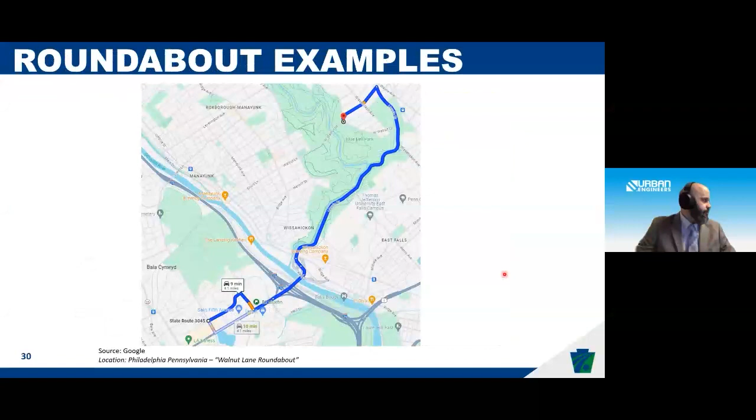Will access to Fairmount be via Conshohocken State Road during construction? I guess, Andrew, can you just go over again the MPT setup? And I'm not familiar with the second part of that question. Yeah, can you read it one more? Yeah, I'll try to find it on the chat. I guess the question was, will access to Fairmount be via Conshohocken State Road during construction?

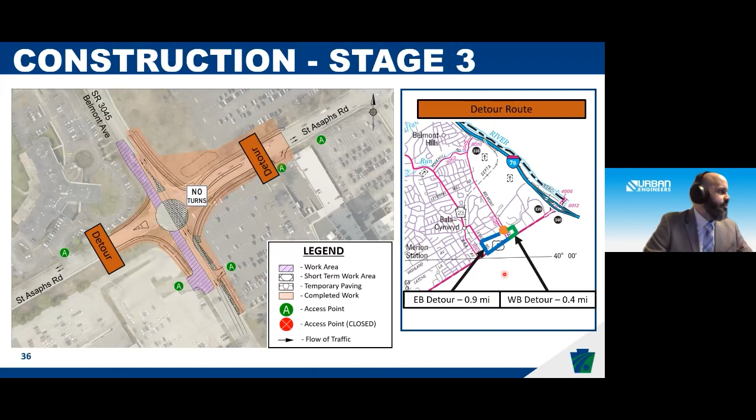Yes. When St. Asaphs Road is detoured, they'll have to utilize Route 23, which is Conshohocken State Road. I'll use the red laser pointer here. The Fairmount condominiums are located near the intersection of St. Asaphs and Route 23.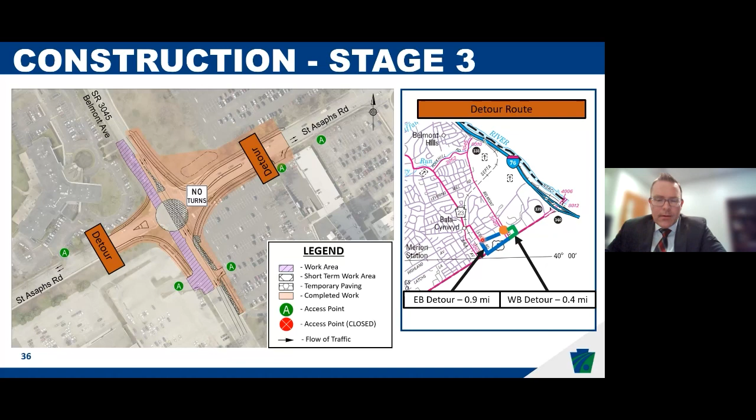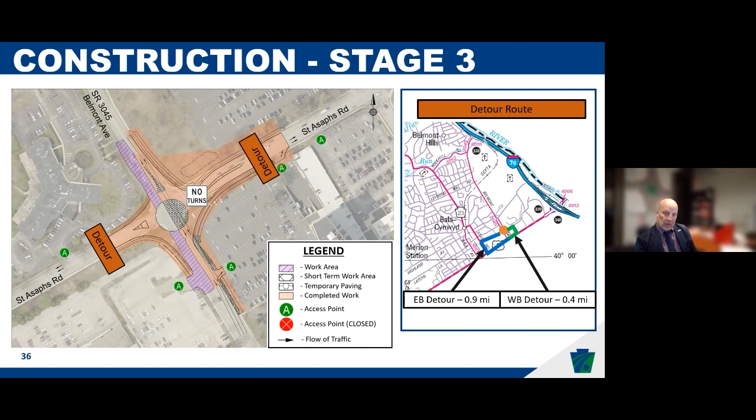Next question is, how will deflection slow speed for a 2-lane roundabout? Inherently we design them for a curvature. So it's almost like if you were to put your eyeball down onto the plan sheet and look straight through the intersection, there is a wider pavement. So acknowledging that the multi-lane has a wider pavement section, that is true. But we still provide those deflections.

So if you were to travel through the roundabout going westbound on St. Asaphs, drivers will have to turn their wheel to the left and then to the right as they cross the yield bar, and then again left. So it's a type of chicane movement, and those radiuses and that geometry will be constructed to physically not be able to drive straight through the intersection.

And Mike, is it fair to say that when we're looking at the fastest path through a roundabout, we're not focusing on a vehicle staying in its lane, but we're drawing the fastest path where it could take up as much of the pavement as it wants to? That's correct. When we do our fastest path calculations, which is really trying to see how fast a vehicle can drive straight through the intersection, ignoring lane striping, we have to document that the design will accommodate slower speeds.

And again, it's the eyeball test. If you put your eye down and look at it on a piece of paper on the table, we just wouldn't be able to draw a straight line through the intersection. And that really is a quick and easy way to show an effective roundabout design.

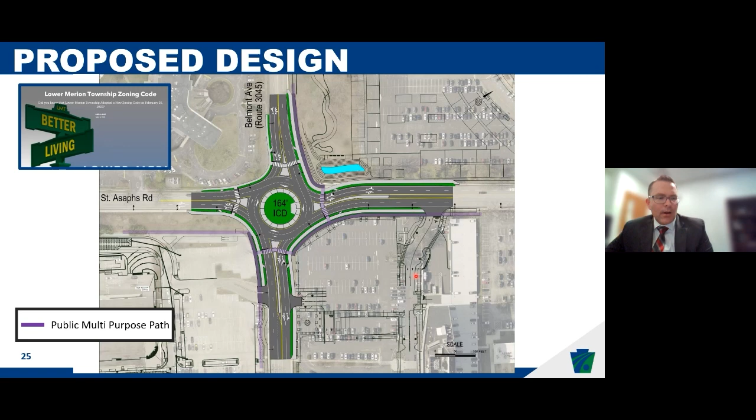And just a reminder that the traffic modeling that we were showing tonight is based on the year 2047, right? So even over 20 years from now, it's still showing to operate in an acceptable manner with queues and delays in the area. Yeah, and injecting the proposed developments' additional trips.

Are you aware of the amount of ambulances and fire engines that rush down our street on a daily basis? Has that been considered? Yeah. Go ahead, Mike, sorry. No, it's a really good question. When we talked about accommodating for the larger vehicles, we are aware of emergency response needs. We have had discussions with the police and emergency response folks.

And those WB 62 with the 53-foot trailer are really the worst case scenario. As Andrew mentioned, it's really the largest vehicle that has the most restrictive turning radiuses and the largest envelope that we need to accommodate. So as long as we're accommodating for the larger vehicles, the police and fire vehicles will be adequately able to navigate the roundabout.

How will you train people to use the roundabout properly? I've seen people going the wrong direction on the new circles in Fairmount Park near the Please Touch Museum.

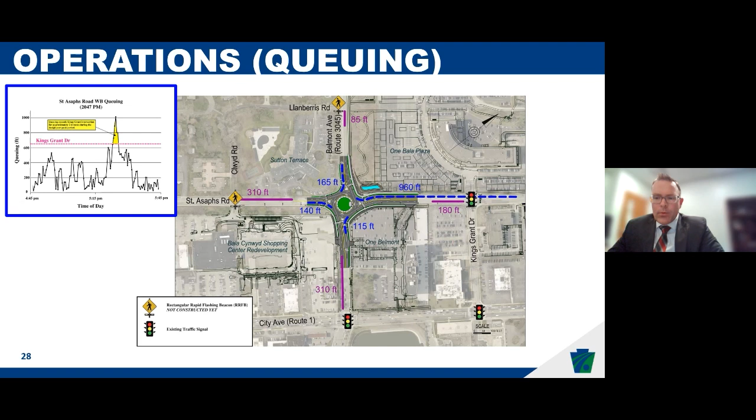Isn't this plan exactly opposite of what the township is doing by removing triangular pedestrian stopping points on Montgomery? I can't say I'm familiar with what the township is doing, but we can always discuss it with them and see what they've been doing in that area. Nate, I'm familiar. I think what she is referring to is the skewed intersections where there's an acute angle. And so I don't think it has similar context to this.

Although we're providing deflection and not allowing vehicles to drive straight through the intersection, one of the things that we really keen in on is making sure we accommodate the sight distance lines that are needed to adequately navigate, to properly stop and have intersection sight distance as well. So we are not skimping on any parts of that design and have made sure that we meet all the criteria. The intersections I think that are being referenced are ones that have really poor intersection sight distance, and so they're trying to navigate some of those safety concerns associated with those poor sight distance lines.

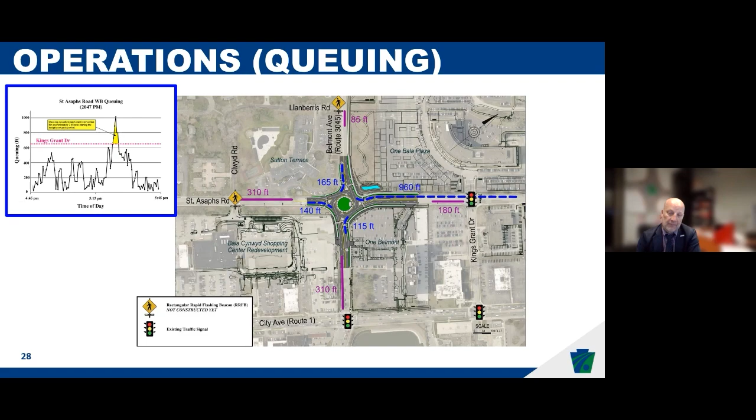I appreciate the comment. And although I know it's difficult for us to speak and answer questions in this type of format, I really appreciated all the questions. I think it is an educational process, and it starts with meetings like this one today. So I hope we did a good job of answering your questions.